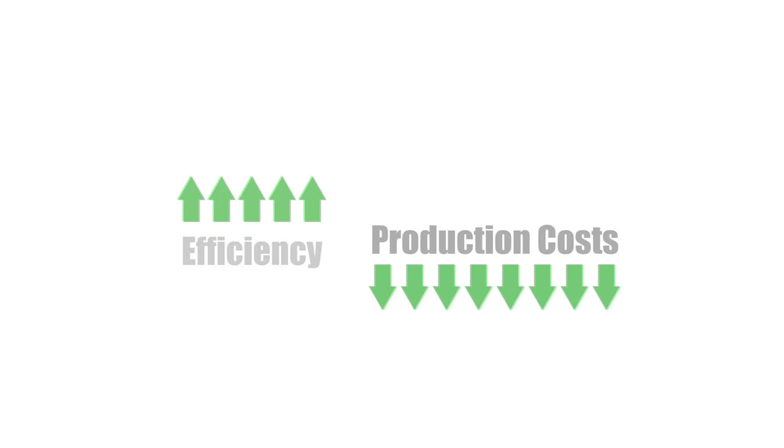Filter Project water treatment plants are designed to recycle water during stone fabrication. Water treatment plants can boost efficiency and lower production costs, making them an important part of running a profitable fabrication business. This animation has been created to take you through the stone water recycling process, outlining in basic language how Filter Project water treatment plants work.

The liquid in this tank is water with particles and has not been sufficiently clarified for reuse. This tank is filled from various sources, one being a drain that runs from the fabrication shop. The drain delivers slurry produced from the wet saws and tools inside the shop. The liquid contains stone particles and flows into a holding tank.

This holding tank also receives partially recycled water from another part of the system. We will look at that later in the process. But for now, let's see the first phase of the water treatment process.

A submersible pump sends the slurry out of the holding tank up toward the separator. However, the slurry must be treated to accelerate the separation of the particles from the water. This treatment is performed using dosing units, which mix polyelectrolytes with the slurry as it is pumped to the clarifier.

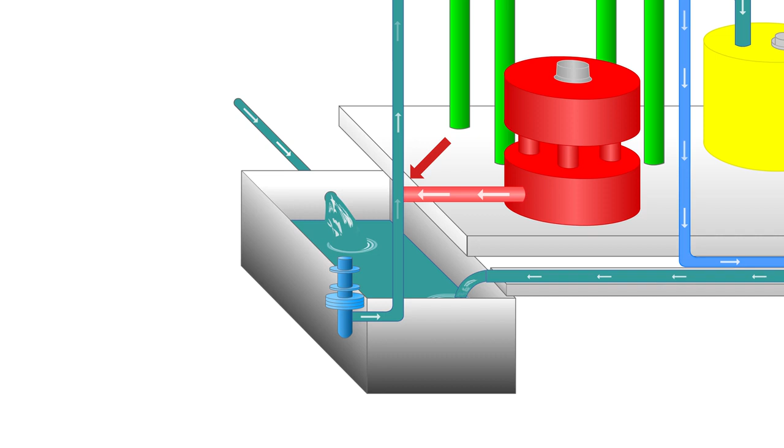As the slurry is pumped up to the separator, polyelectrolytes are precisely mixed with it. This part of the process prepares the slurry for the settling tank, where it will go through the first stage of separation.

Once the slurry arrives at the separation tank, the clarifying process begins. The water is delivered toward the bottom of the tank. Having been treated with polyelectrolytes in the previous phase, the liquid and solids behave a bit differently.

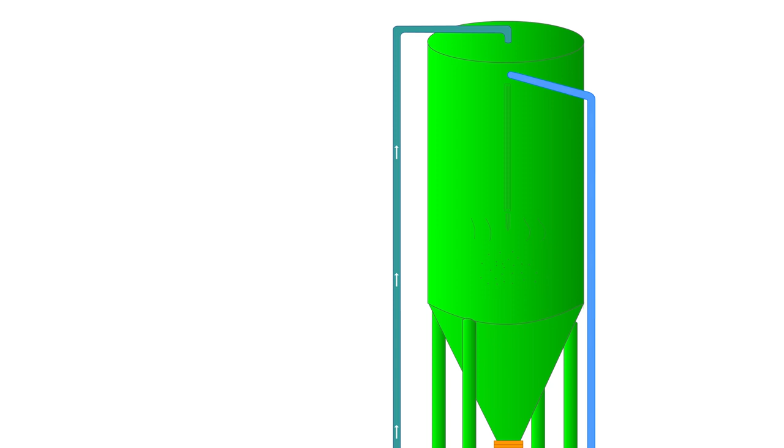The particles tend to sink toward the bottom of the tank, while the cleanest water is closest to the top. This clean water at the top of the tank is ready to be reused, so it is drained off the top and sent back into the shop's water supply via a holding reservoir.

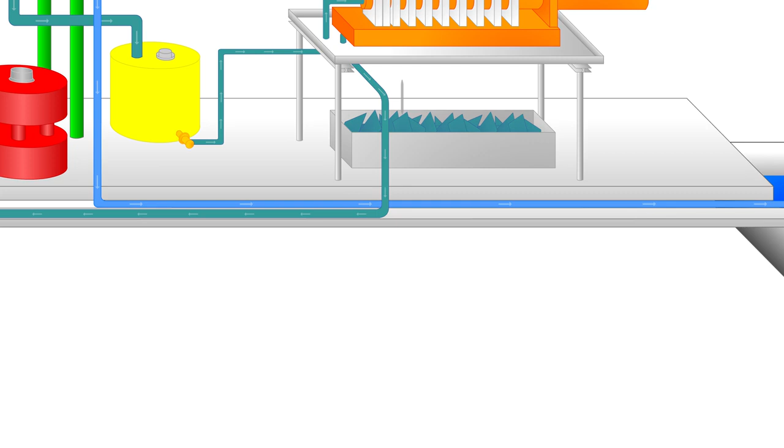The mixture of water and particles further down the tank is not yet clean enough for reuse. In fact, this mixture is thicker than the slurry it used to be. It has the consistency of mud and is often referred to as sludge.

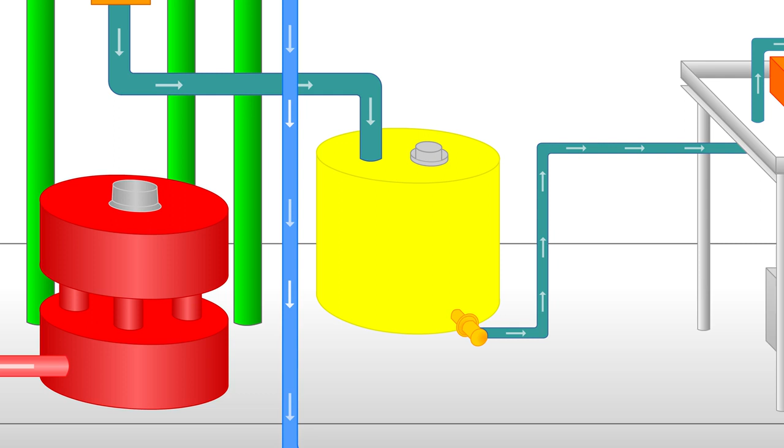This sludge drains into a mud tank where it moves to the next phase of treatment. The mud, or sludge, is then pumped out of the mud tank to another station called the filter press.

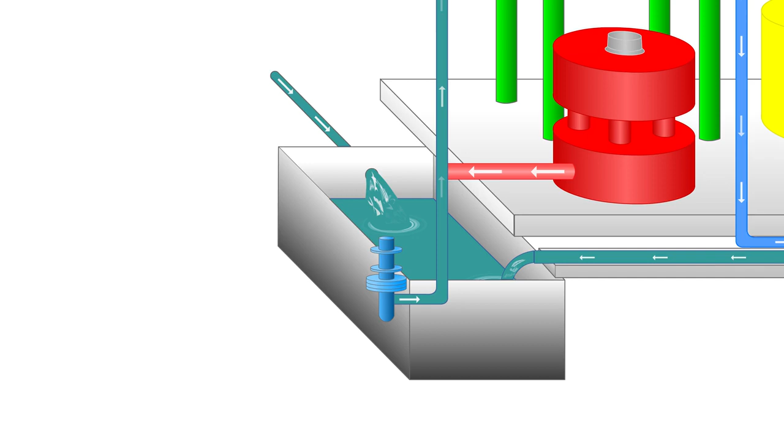The filter press operates on the mud using pressure and air. It forces the water out of the mud and retains the solids. The water from the filter press is sent back to the initial holding tank, where it will be sent back through the clarifier.

The filter press holds the particles that it removes from the mud. Once the plates in the filter press are full of particles, the result is a pressed and damp cake. This cake is made up of the stone particles that were originally in the slurry at the beginning.

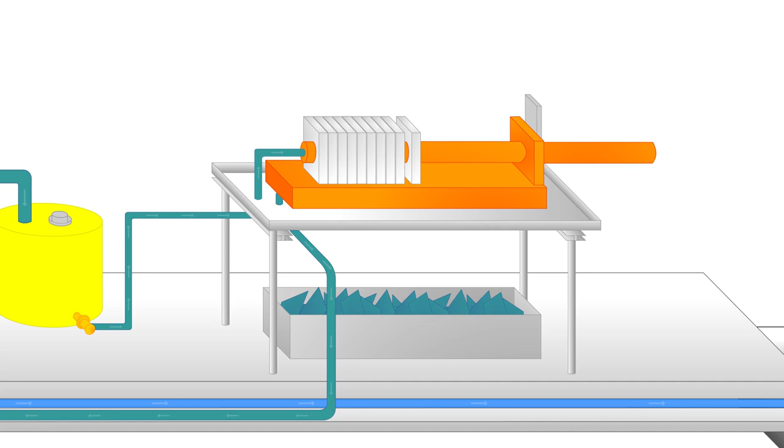As we have seen, the water treatment process is a way of circulating water and particles. By sending the mixture through a cycle of treatments using chemicals and force, the water is filtered. Once the water is clean enough to be reused, it is sent back to the shop where it is used